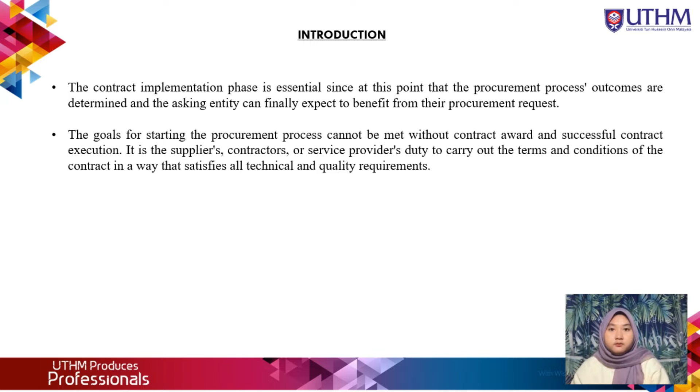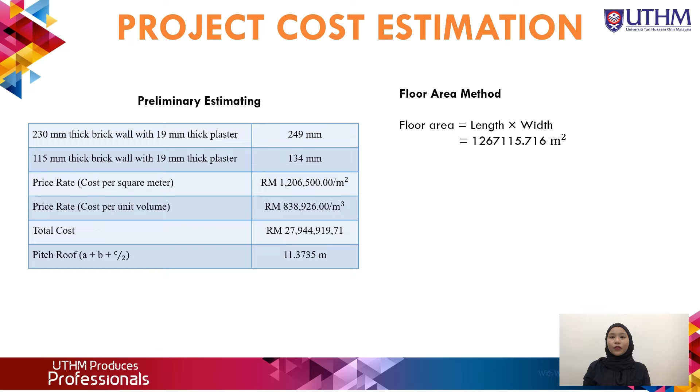I will go over our project's cost estimation. The preliminary estimating table on the left is used to calculate the floor area method and building volume method. The calculated floor area for the floor area method is 1,267,115.716 square meters, and the total cost is 149,258,011 ringgit and 10 cents.

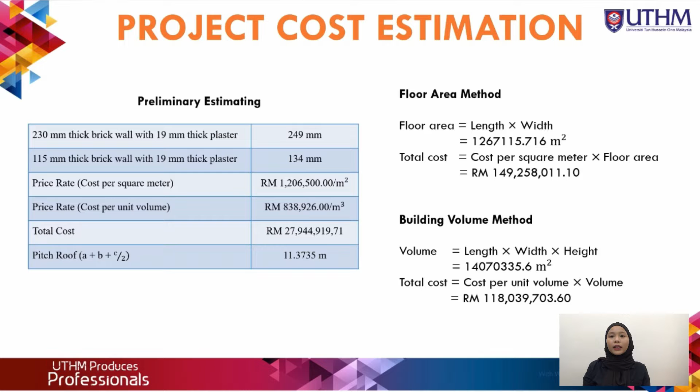Meanwhile, the volume calculated for the building volume method is 14,070,335.6 meters square, and the total cost calculated is 118,039,703 ringgit and 60 cents.

Assalamualaikum warahmatullahi wabarakatuh. My name is Muhammad Asif bin Anis, AF190033. I will explain about quantity measurement.

Quantity is how much of something there is, measured in units that depend on what it is. So, quantity means how much of something is there, was there, or will be there. In construction, measured quantities are usually part of a bill of quantities, which is BOQ, and show how much of something is needed to build a building or part of a building.

The absence of measured amounts would necessitate that the competing bidders on a project take off the quantities on their own. The client's task of assessing the bids will be made more difficult by the presence of many bidders using potentially diverse procedures and the possibility of human error.

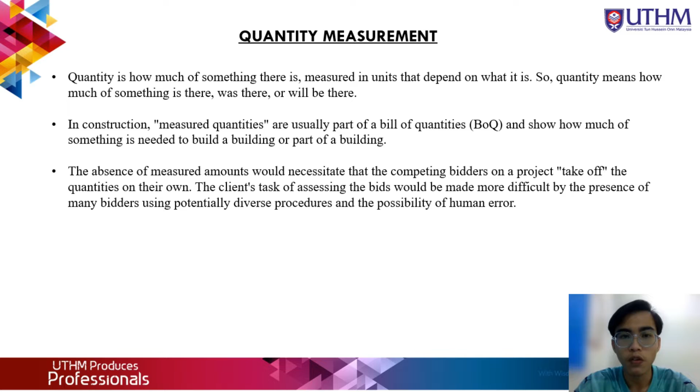Next, I will explain about taking off. There are 9 part lists of taking off calculation. Number 1 is excavation work, which includes excavation topsoil, surface excavation, pit excavation 1/3 until 3/3, and trench excavation. Number 2 is concrete works. Number 3, formworks. Number 4, reinforcement in stumps.

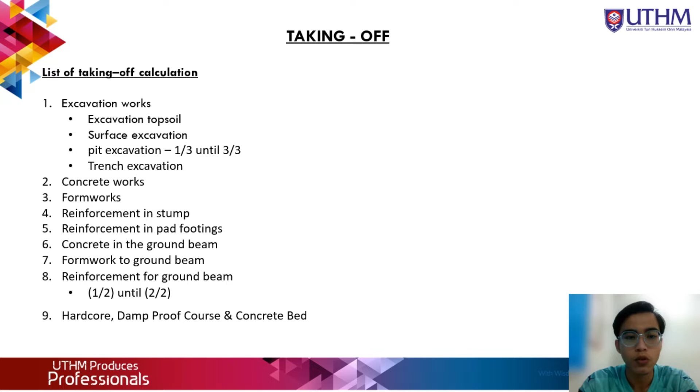Number 5 is reinforcement in pad footings. Number 6, concrete in the ground beam. Number 7 is formworks to ground beam. Number 8 is reinforcement for ground beam 1/2 until 2/2. And last but not least, number 9 is about hardcore, damp proof course, and concrete bed.

This is our example of taking off for our project, which is about excavation work, the excavation topsoil part. For the taking off, we need to construct a table divided into 5 parts, which are times, dimension, result, descriptions, and remarks. First of all, we need to know our length, which is 9.400 meters.

So next we need to add the foundations. There are 2 foundations, so we need to times by 2. Get the center of the foundation, so 0.5, and our area of foundation, which is 0.3. So 2 times 0.5 times 0.3, we get 0.3. Then we need to minus it from the length, and after that we get 9.100.

Next, we need to calculate the excavation topsoil for preserving, average 100 deep. After that, we need to calculate the preserved topsoil in temporary spoil heaps, average about 10 meter distance. For the further calculations, you can get them from our group report project. That's all from me. I will pass to the next presenter.

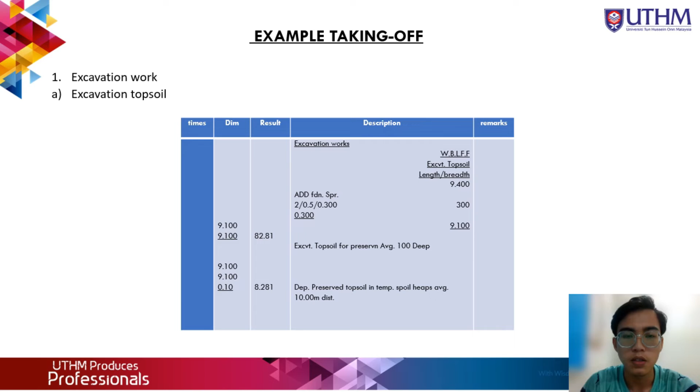Assalamualaikum. My name is Muhammad Yakin Makiruddin. For my part, I will talk about the bill of quantity. The items in the bill of quantity are excavation of topsoil, surface excavation, pit excavation, trench excavation, concrete works, formwork

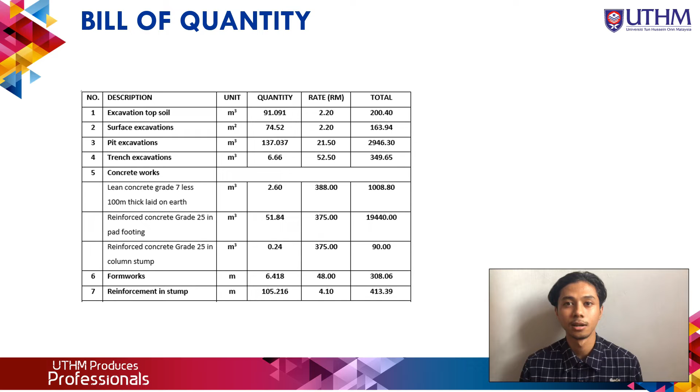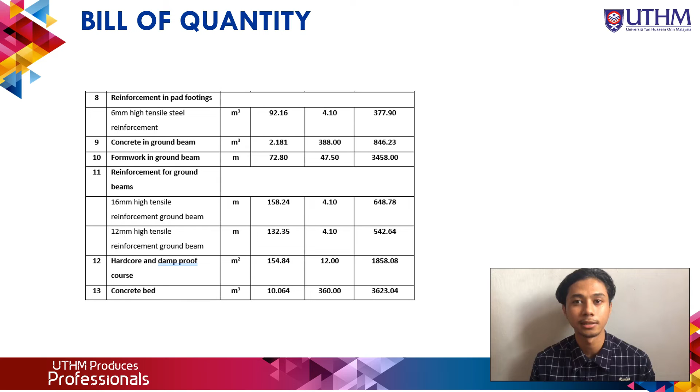and reinforcement in stump. For the next part of the bill of quantity, there are reinforcement in pad footing, concrete in ground beam, formwork in ground beam, reinforcement for ground beams, hardcore and damp-proof course, and lastly the concrete bed. Next, I'm going to present the build-up rate calculation of 1 meter cube soil excavation.

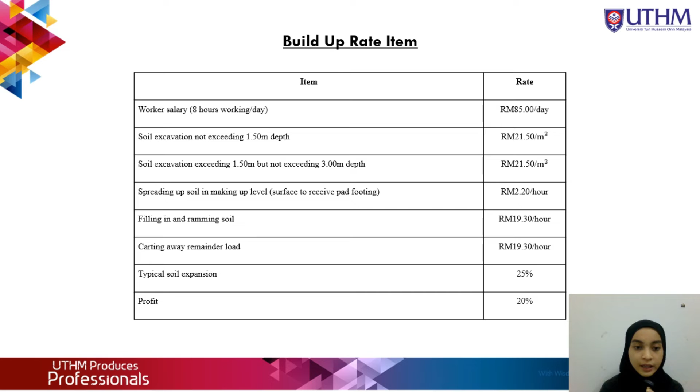Build-up rate item. The table shown below is the item and rate for worker salary, soil excavation not exceeding 1.5 meter depth, soil excavation exceeding 1.5 meter but not exceeding 3 meter depth, spreading soil in making up level, filling and ramming soil, carting away remainder load, typical soil expansion, and the profit.

Next is cost excavation unit. We got total depth of excavation of 3.746 meter, volume of excavation 3.375 meter cube, volume of excavation exceeding 1.5 meter, 0.56 meter cube. The cost is 16 ringgit and 1 cent.

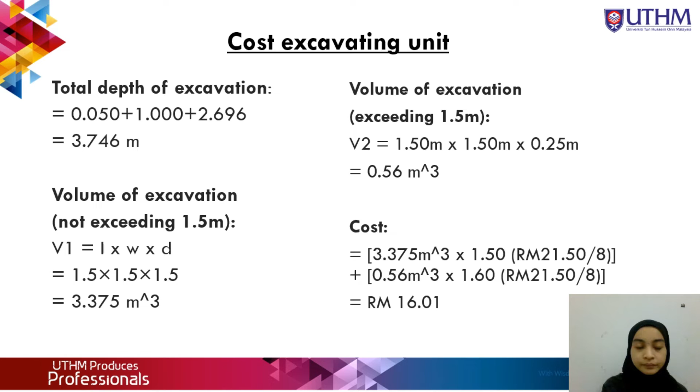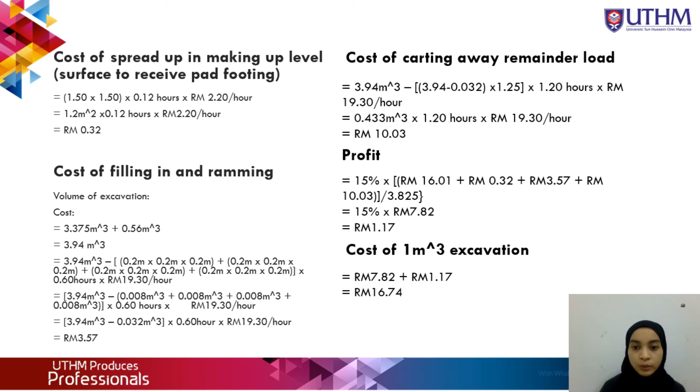Next is cost of spreading in making up level 32 cents, cost of filling in and ramming 3 ringgit and 57 cents, cost of carting away remainder load 10 ringgit and 3 cents, profit 1 ringgit and 17 cents, cost of 1 meter cube excavation 16 ringgit 74 cents.

Next is the build-up rate calculation for 1 meter cube of selected concrete grade using a concrete mixer. For this project, we use concrete grade 25. For the material cost, the total up value is 876 ringgit. Wastage plus shrinkage equals 50%. So 50% of 876 ringgit equals 438 ringgit. 438 ringgit per 4 meter cube of concrete equals 109 and 50 cents.

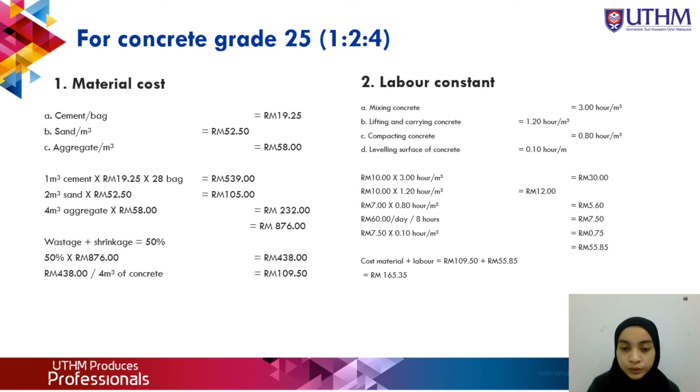For the labor constant, we've got the cost material plus labor equals 165 ringgit 35 cents. For the other information, we have skill labor, general labor, and overhead. The total up of each value is 18 ringgit and 13 cents. Cost material plus labor plus other information equals 183 ringgit and 48 cents.

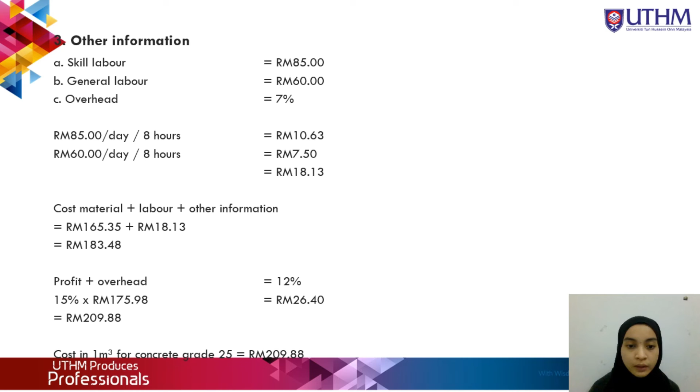Profit plus overhead equals 209 and 88 cents. So cost in 1 meter cube for concrete grade 25, we've got 209 and 88 cents. Next, breakdown of the project cost and schedule. There are 5 elements, which are excavation, concrete, reinforcement, bar reinforcement, and formwork. The total for the breakdown of the project cost is 36,275.21 ringgit Malaysia.

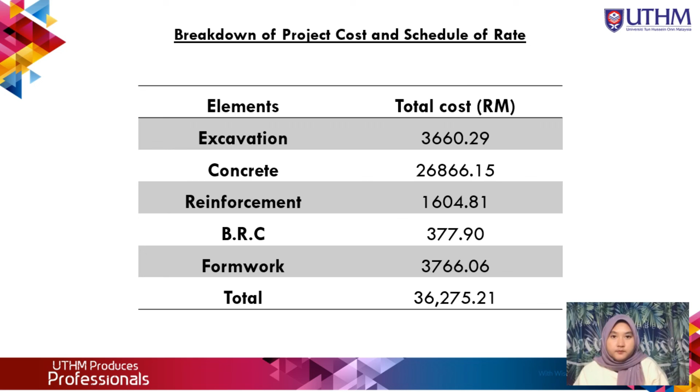Next, I will continue with the performance bond. To get the amount of the performance bond, we need to total up the contract sum by adding the prime cost sum and preliminaries. The performance security bond is 5% and we multiply it with the contract sum to get the total performance bond, which is RM 1824.65.

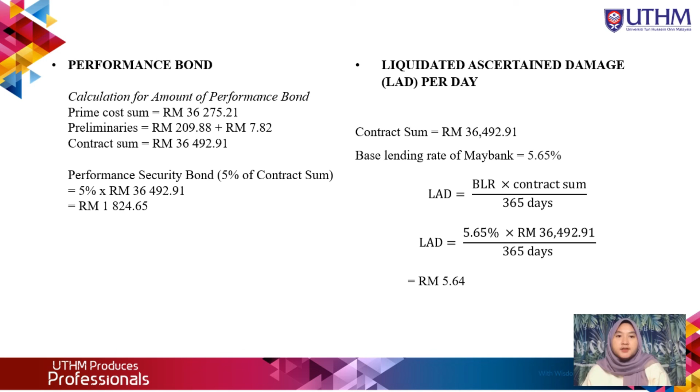For the liquidated and ascertained damages, the base lending rate for the Maybank is 5.65%. In order to get the LAD, the base lending rate is multiplied with the contract sum and divided by 365 days, and the amount of the LAD is RM 5.64.

As for the conclusion, the drawings of foundation, column stump, ground beam and ground floor give us the vision of how we will estimate the cost to build our project. Based on our calculation, the cost of 1 meter cube excavation is RM 7 and 82 cents. Next, the cost of 1 meter cube of grade 25 concrete is RM 209 and 88 cents. And based on the bill of quantity, the total contract sum for our project is RM 36,492 and 91 cents. Thank you.